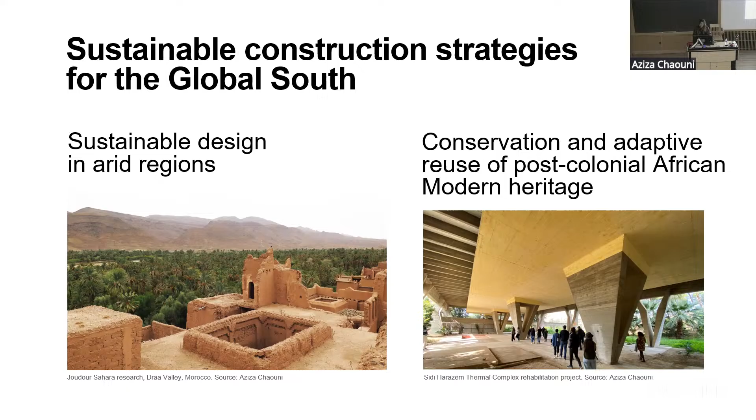Over the years, these two focused research streams have increasingly centered on the African continent and have remained intimately interconnected, both aiming to address various conditions of scarcity, a theme with a recent resurgence in architectural discourse. In the regions where I operate, manifold scarcities abound: materials, water, food, landscapes, public infrastructure, public space, financing, governance, arable lands, expertise, and so forth.

These conditions of scarcity are further exacerbated by climate change's nefarious effects, such as long droughts, floods, and wildfires, as well as a post-colonial condition that compounds models of social injustice and unequal distribution of resources. You may wonder what makes these seemingly doomed environments fertile ground for research and practice with potential global implications.

In addition to the ethical urgency of developing locally rooted architectural solutions for this built environment, whether booming urban centers or disappearing oasis villages in the Sahara, arid contexts stimulate new ways of thinking, designing, collaborating, forging solidarities, and engaging with stakeholders, thereby crafting novel models for sustainable architectural practices. Such scarce contexts also urge us to critically reevaluate the abundance and endless growth paradigms embedded in our capitalist economies.

The full potential of working in and investigating scarce contexts is unleashed when we challenge the common conceptualization of scarcity, which typically focuses on tangible shortages defined as situations where demand continuously outstrips supply, leading to progressively dwindling reserves. Instead, we should consider resources not as isolated commodities, but as part of a complex social, economic, political, and environmental ecosystem.

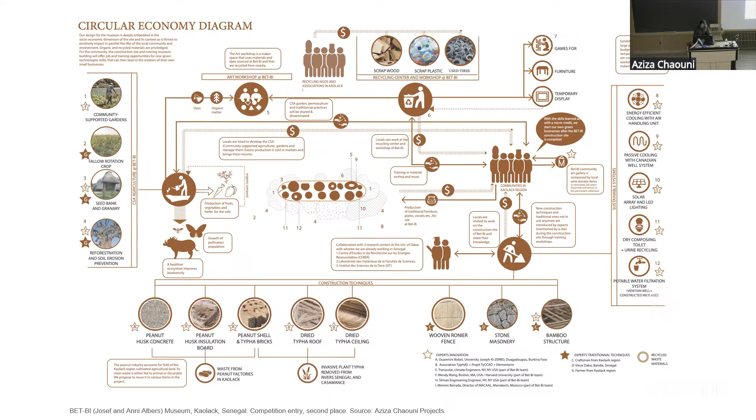If I use the lens of scarcity to present my work today, it is not simply to remind everyone of the challenge facing our planet and profession, but to introduce an interesting channel of exchange between the global North and global South. Through this channel, knowledge transfer can flow in both directions, enriching new avenues for mutually beneficial research on sustainable construction.

For instance, the academic environments of my past homes, the University of Toronto and Harvard, and my current home, EPFL, along with my experience working with Renzo Piano, my office experience, and my dual training as an architect and civil engineer, have allowed me to develop techniques and methods specific to contexts in the global South, which then came to inform other sites and pedagogies back in the global North.

I firmly believe that some of the solutions for a sustainable tomorrow will be found as much in such cross-fertilization as in interdisciplinary collaboration. My extensive practical and teaching experience around the globe, extending from New Caledonia, Australia, North America, Brazil, to the Middle East and Africa, has allowed me not only to erect and rehabilitate a series of buildings, but also to build solid and lasting relationships with a wide network of governmental, academic, and civil society institutions.

This network forms a solid base for continuing such pursuit at EPFL, whose rigorous academic environment can only amplify its impact on a global scale. Let me illustrate this process further through my two research streams. The first one, sustainable design in arid climates.

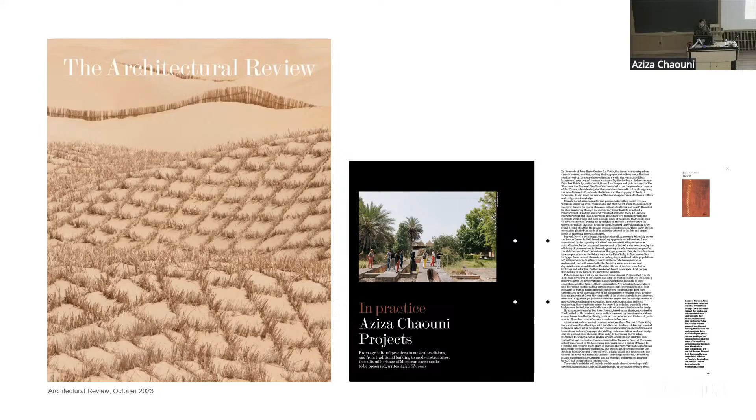I experienced firsthand the relative nature of scarcity. What is scarce to us is not to nomadic tribes who can thrive with little water and a simple mobile shelter made out of camel hair.

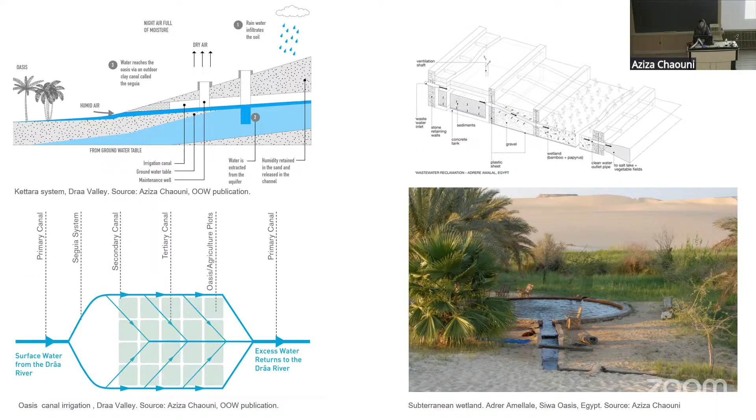I discovered means used to address a scarcity that was exponentially expanding before my very eyes, derived from both traditional techniques like water catchment through the old Kettara channels or the communally managed ancestral oasis irrigation system, and the new ingenious ones like the subterranean water treatment wetland of Adrère Amellal in Siwa, Egypt.

This research journey led me to obtain the Aga Khan Fellowship at Harvard, where I formalized my fieldwork, further investigating the theme of desert tourism globally, taught courses on the topic, organized an exhibition, international conference, and published 2 books in collaboration with Virginie Picon-Lefebvre.

This Saharan trip also led to the creation of the Designing Ecological Tourism Lab at the University of Toronto, which offered numerous applied research seminars and studios in Morocco, Jordan, and Australia, and inspired journal articles and a book of our research on the creation of a newly protected area called Shobak in Jordan, located north of Petra.

Throughout the studios and seminars, students addressed the extreme scarcity of natural resources, materials, and funds, leading them to think across scales and in an integrated manner in which landscape, infrastructure, and architecture were apprehended as one system. Working hand in hand with partner institutions and schools has been key, and also with sociologists and ethnographers prior to site visits.

Students had the opportunity to continue working on their project as researchers over the summer terms, returning to the site for more fieldwork and compiling research data, a pedagogical model that I was the first to develop at the Daniels Faculty at the University of Toronto.

Currently, I am continuing both this pedagogical model and my 2 main streams of research at my new academic home, the École Polytechnique Fédérale de Lausanne, or for short, EPFL, that I joined in January 2024 after 18 years at the University of Toronto. I specifically moved there to establish a funded lab dedicated to advancing sustainable construction and heritage conservation through equitable collaboration between the global North and South.

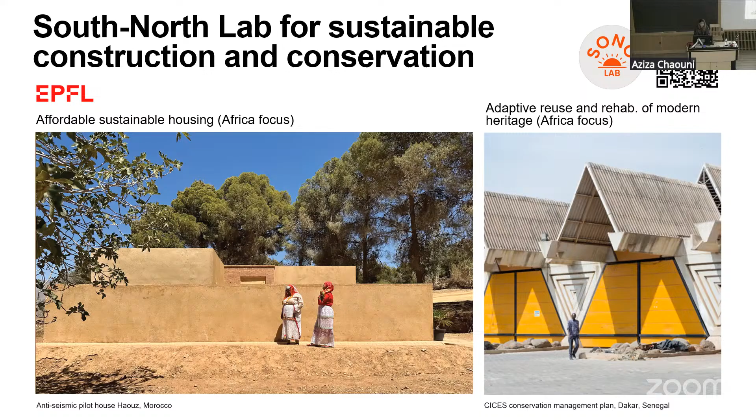Its research is rooted in design, prototyping, and implementation, bridging academic inquiry with practical application. Rather than remaining in the realm of speculation, the Sono Lab tests new models of building and conservation in real context across the global South, ensuring that architecture research is both transformative and directly impactful. In addition, Sono positions at its very core South-North knowledge exchange as a mutually beneficial process.

The lab is housed in the Smart Living Lab, one of EPFL's 4 annex campuses dedicated to sustainable construction. And the lab gathers professors working on different facets of sustainable construction from EPFL and 2 other schools based in Fribourg, making it a fertile ground for collaboration.

The Smart Living Lab is housed in a reused beer factory and has a large workshop ideal for 1-to-1 scale prototyping. And a new timber building is currently under construction that will soon house our offices. This building is designed to be a research infrastructure. It has changeable facade systems and roof components, but is also filled with sensors.

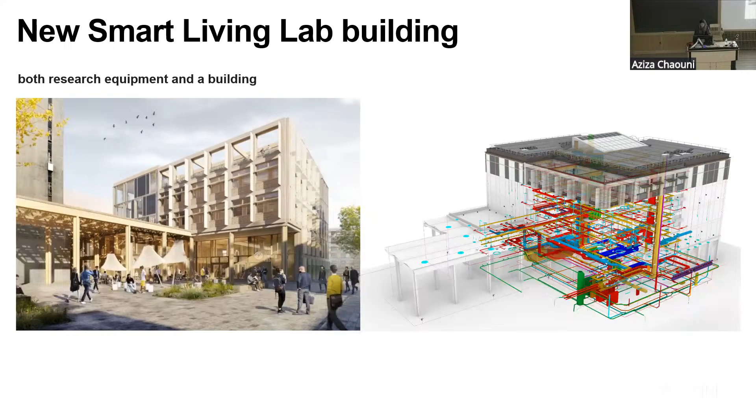After past protectionist approaches failed in Shobak, we proposed that in the first phase, users, rather than a higher authority, become the stewards of the park. To do so, we expanded RSCN's integrated ecological management approach, which offers a holistic manner to integrate all components of the ecosystem, air, soil, water, and organisms, including humans, and ecosystem functions in a broad perspective that encompasses environmental, social, and economic dimensions.

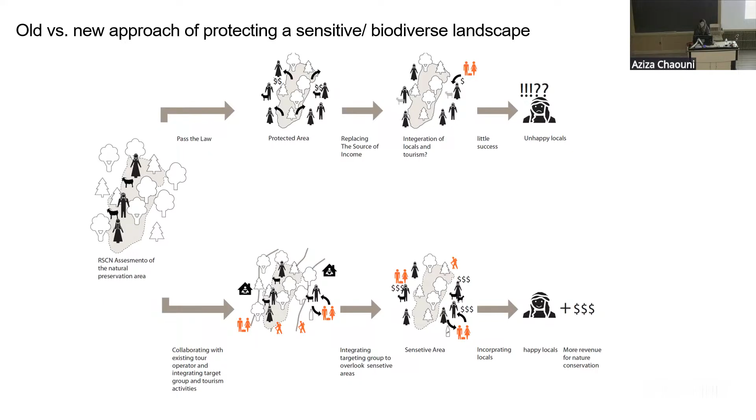This included architectural and landscape dimensions, strategies for both the protection of fauna and flora and the economic development of local populations, most of whom are semi-nomadic herders and foragers. We propose a 2-phase master plan with 3 types of actions: build, upgrade, and organize.

In phase 1, all actions were located in the protected area buffer zone in order to empower locals to become actors of the park safeguarding, while in phase 2, we reinforced low-impact ecotourism infrastructure and the protective environmental measures inside the park. The architectural interventions were designed to be autonomous in water and energy and have a low carbon footprint,

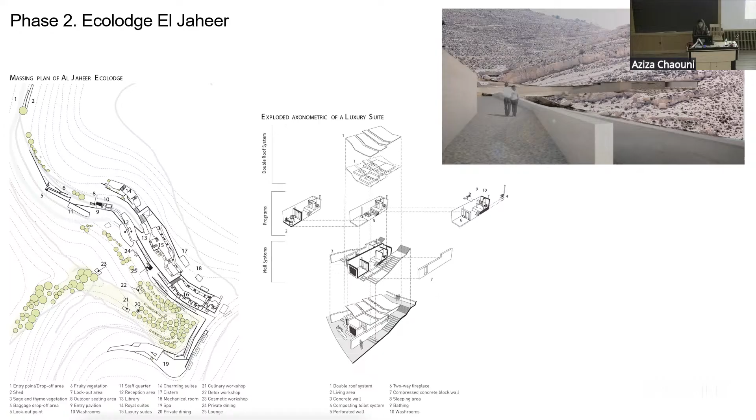favoring adaptive reuse, such as the reuse of this abandoned stone village that you can see here as an eco-lodge, and mobile lightweight structures such as the seasonal modular camp, which uses a steel structure and camel hair fabric.

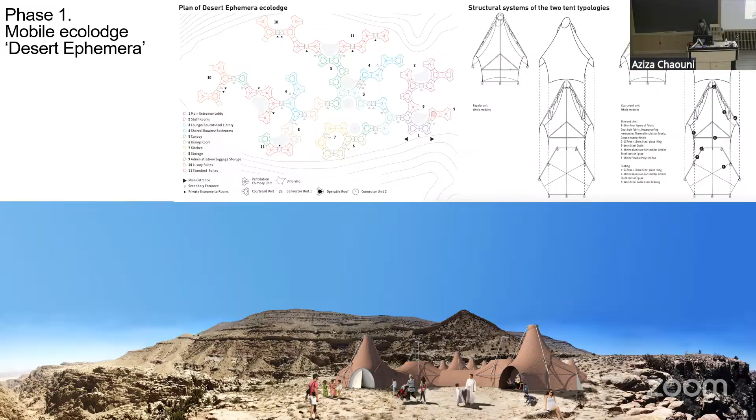Similarly, in Morocco, the NCSAR Research Project aimed to create a new protected area in the southeast in a remote, fragile, arid zone where the endangered mouflon sheep lives. We led this project with the Moroccan Ministry of Tourism.

And working with RSCN that we brought with us from Jordan and planner ecologist Professor Nina Mary Lister as consultants and our sponsor, the Moroccan Ministry of Tourism, we adopted a similar integrated method as in Shobak, in which a menu of guidelines supports the overall master plan and its different zones. So it's like technically a Chinese menu.

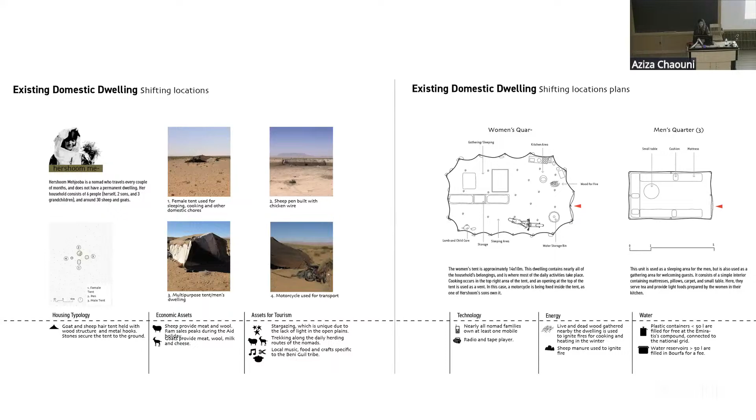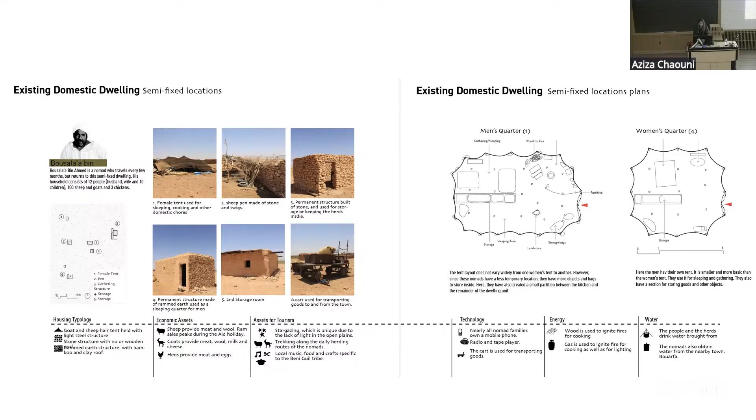The main stakeholders being nomadic and semi-nomadic Beni Guil tribes, we propose upgrading their existing housing and their facilities to host tourists and to better their living conditions, following careful study of their daily routines, their changing lifestyles and their existing dwellings. So here, for instance, our analysis of an existing nomadic dwelling, and here our analysis of a typical semi-nomadic dwelling. Then, through collaborative workshops, we could design their new dwellings using local materials.

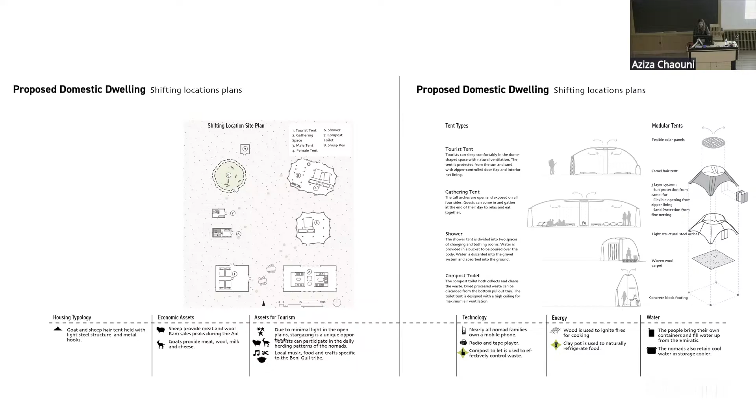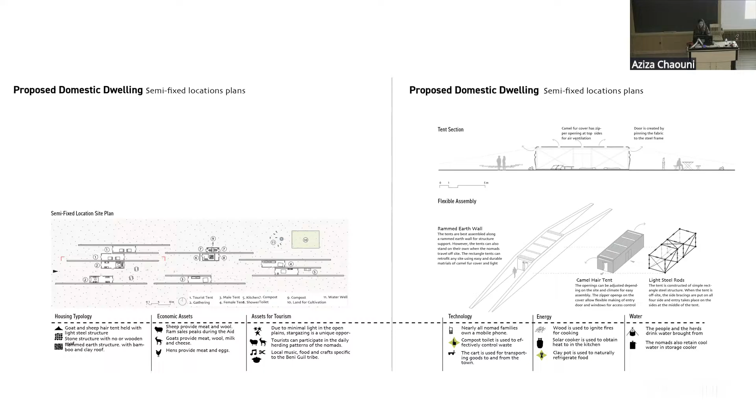So you can see here the nomadic dwelling upgrade in which we updated the existing dwelling kitchen, bathroom, and added a new multifunctional room that you can see here in green. And you can see here the view of this new room. And here is the semi-permanent dwelling in which we repaired and extended the existing rammed earth walls, and we also added new walls and added camel hair fabric for the roofs. And you can see here a view of that dwelling.

We propose to restructure its productive land, its thermal spring, and its derelict village, turning them into a new well-being destination, mainly geared towards locals and Moroccan tourists, focusing on circular economy, agritourism, and thermalism. Following 6 months of consultation, workshops, and interviews with the villagers and stakeholders, we could develop a vision where the oasis permaculture is revived thanks to the thermal spring reuse of water, which has proven to be beneficial to the existing olive trees and palm groves.

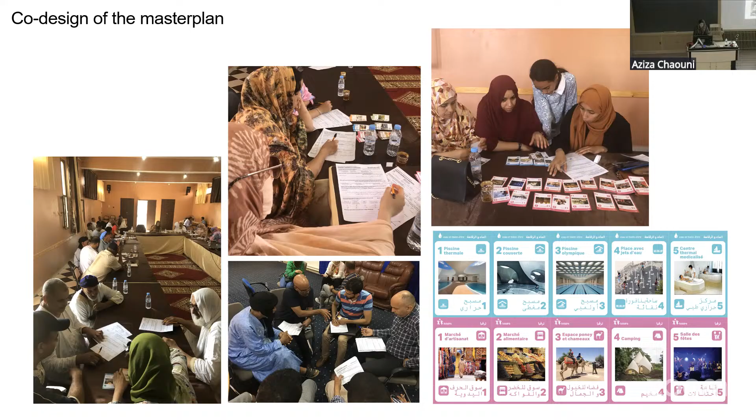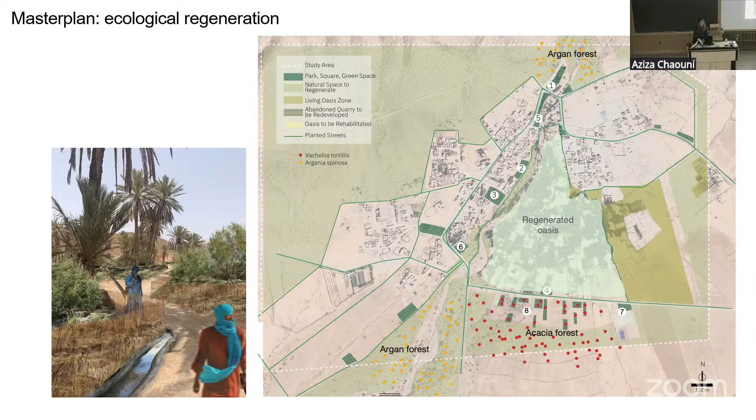The oasis is used beyond its agricultural function and becomes the backdrop for a series of public spaces such as plazas, picnic areas, and playgrounds. Over time, the oasis and surrounding ecosystem regeneration is projected to drastically improve the thermal comfort of the village and its public spaces, bringing back lost fauna and flora.

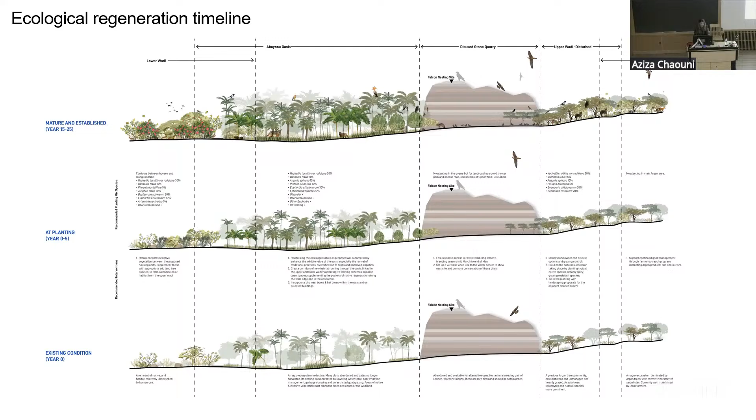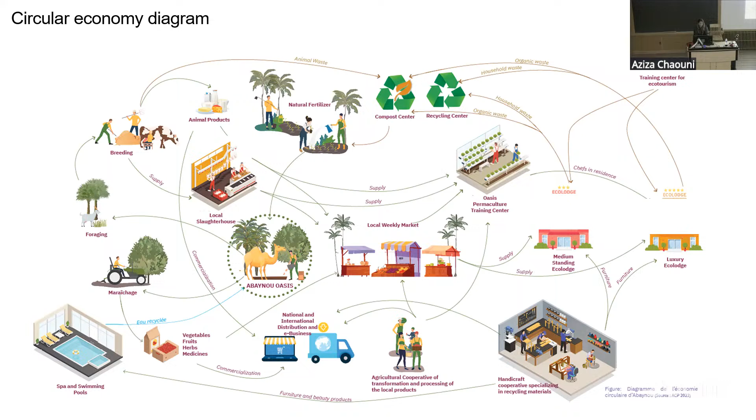An overall water scheme allows for the reuse of all wastewater of the village for public space irrigation and groundwater recharge. The entire project embraced a circular economy model with the reuse of most of its waste, organic waste through a centralized composting center and inorganic waste through a craft cooperative. A detailed guideline booklet outlines sustainable manners to upgrade the village center's existing buildings, old and new, all using local materials such as earth, stone, wood, and reeds.

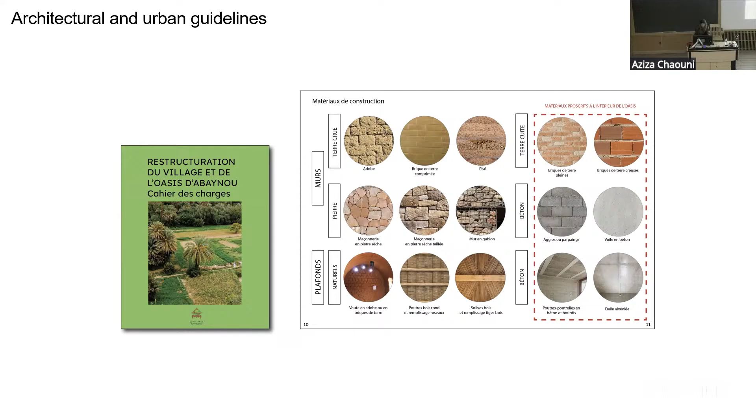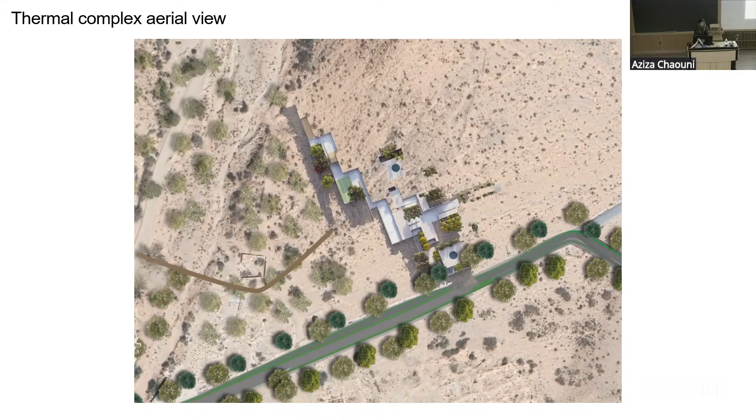Unlike the norm in Morocco, where new thermal institutions are always high-end and out of reach for most locals, we convinced the region of Guelmim, our client, that we should democratize access to this ancestral spring that locals visit weekly today. Everyone will be welcome in this new thermal complex main pool, but different levels of service will be offered depending on one's budget. We integrated the new thermal complex, built with stone masonry from a nearby quarry and compressed earth bricks, within a steep hill with only few volumes emerging, echoing the vocabulary of the local villages nearby.

This allowed the spring water to be used and reach the oasis irrigation system by gravity. This project demonstrates that Aziza Chaouni Projects, my office, intervenes beyond research and design, where we are also community organizers and lobbyists.

In addition to ecotourism, one of my most significant contributions to addressing scarcity in arid regions is my research project, Out of Water, Design Solutions for Arid Climates, co-led with my colleague at the Daniels Faculty, Associate Professor Liat Margolis. Both born and raised in arid countries, we sought to develop a toolkit for designers to address scarcity within their projects.

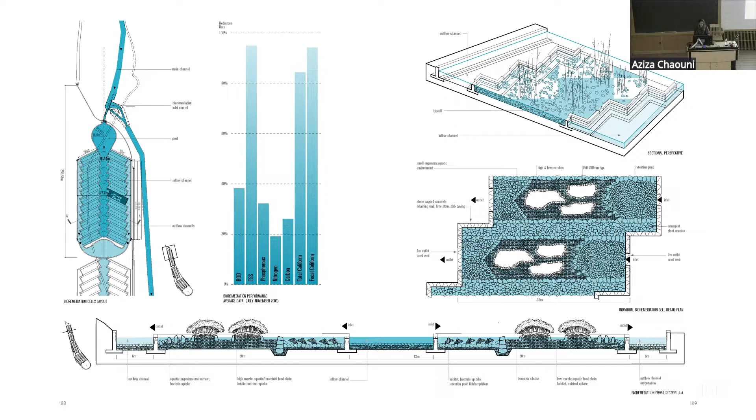Based on 5 years of research, the preparation of and feedback on a traveling exhibition, as well as a major conference, the results of the Out of Water project are presented in a series of case studies and essays by international experts, including analytical drawings of both projected and existing solutions. We developed an analytical matrix by which we analyze each project's performance and energy consumption with the support of detailed drawings.

Our most potent conclusions to address water scarcity within the design disciplines included first the integration of ancestral knowledge and technologies from other fields, such as agriculture, into design, and secondly, the necessity to completely rethink our centralized water system and its outdated single plumbing approach, along with reimagining landscapes and buildings to capture, store, treat, and distribute water to make every single drop of water count.

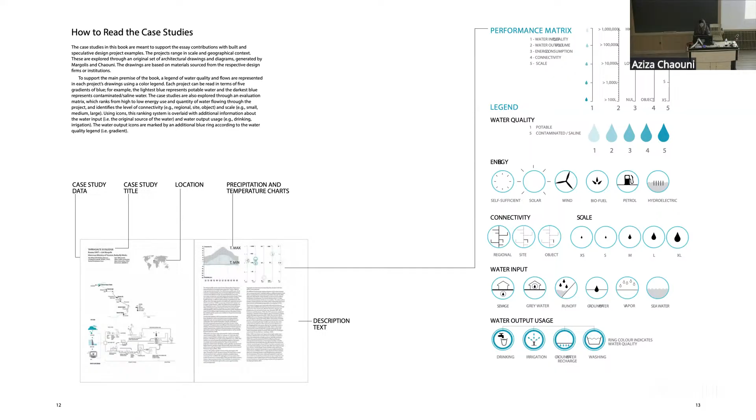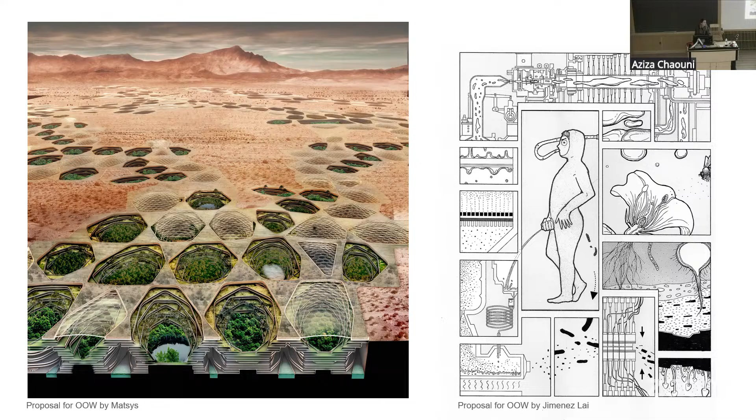As part of the project, we invited a dozen architects to apply this principle in designs for a water-scarce tomorrow. You can see here a utopian vision of a future town in the Arizona desert, and on the right, a utopian or dystopian future by Jimenez Lai, very Dune-like, imagining a bodysuit that would recycle your own urine.

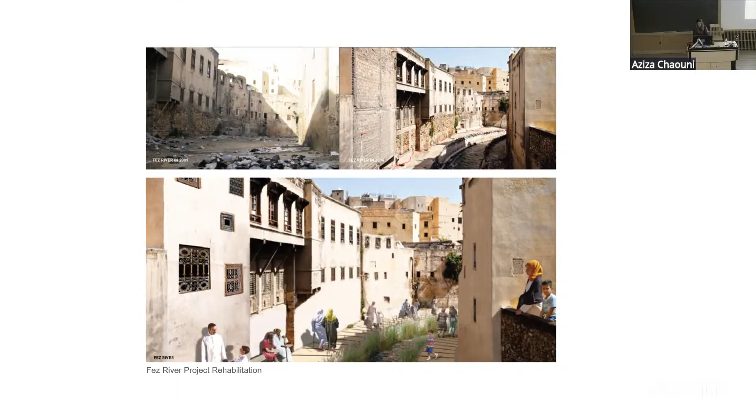So in my own practice, I would say that my most significant contributions to this stream are the Fez River Project and the Jodour Sahara Music School, which both won Holcim Awards for Sustainable Construction. The Fez River Project included the depollution and uncovering of the river that crosses the UNESCO World Heritage City of Fez, which had become an open-air sewer. Due to time constraints, I will not dwell on this project today, unfortunately, but you can listen to my TED Talk about it, which you can find on YouTube.

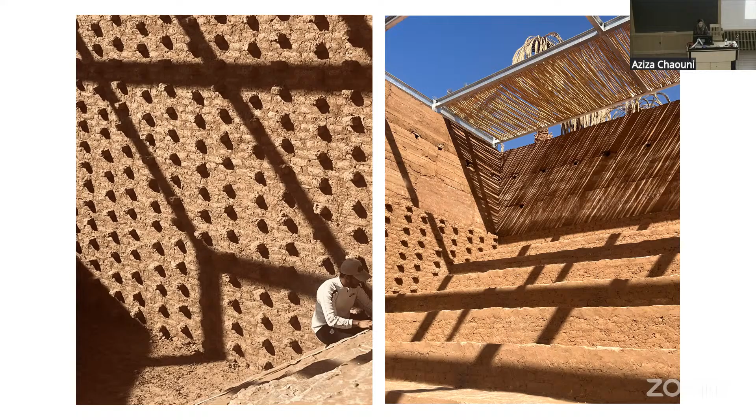But instead, I will focus on the Jodour Sahara project, which is actually extremely dear to my heart. It started as an NGO that I co-founded by luck in 2016 with other foreign and local partners that offers free music, dance, and environmental awareness classes to around 1,200 children and youth living in the oasis of M'hamid El Ghizlane, located at the very end of the UNESCO biosphere, the Oasis Valley of the Dra in southern Morocco.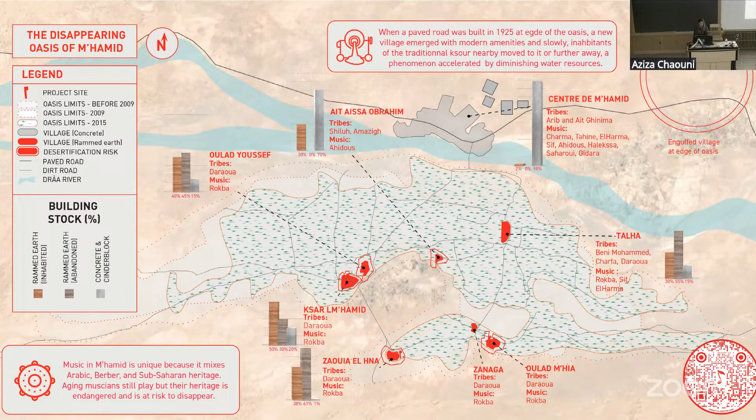M'hamid is terribly affected by drought and climate change, and its centuries-old cultural, architectural, and agricultural heritage is declining, literally being swallowed by advancing sand dunes. Actually, based on my experience, sand dunes would advance by about 1 meter each year. M'hamid's exceptional culture is a mix of Saharan, Berber, Hassani, and Sub-Saharan cultures, and has a vast and diverse repertoire of dance and music.

A perfect illustration of what I refer to as slow architecture, like slow food, the project proves Cedric Price right. The solution was not architectural space at first. Instead, the school's curriculum, training, and instruments, as well as the collection and translation of traditional songs and dances, were first reestablished.

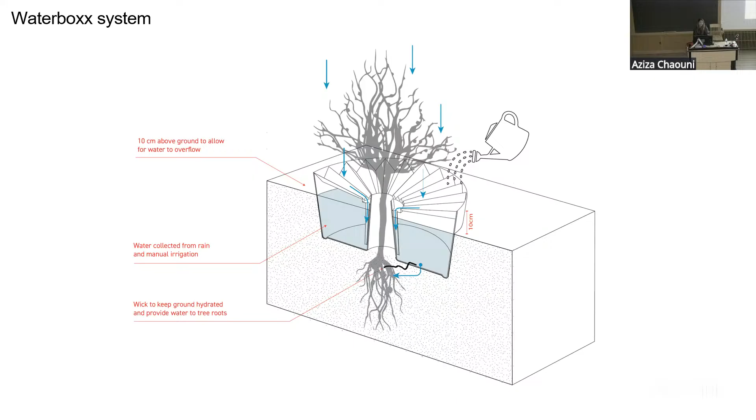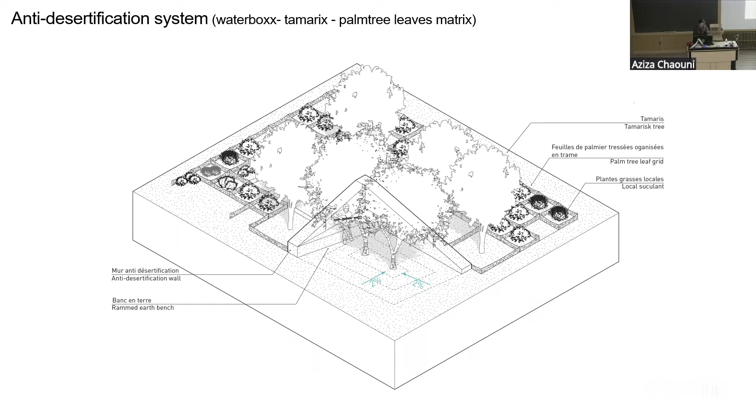Then we tested various anti-desertification techniques over a decade with our partner, the NGO Sahara Roots, using the Waterboxx system, which you can see here, a simple recycled plastic device which provides roots with only the right amount of water that they require, combined with tamarisk trees whose roots stabilize soil, and a palm tree leaves matrix planted with succulent plants. The combination of these systems has proven successful, achieving a 75% survival rate for tamarisk trees after 3 years compared to 30% with usual drip irrigation.

When it came time to expand the school due to its growing success, we proposed a new campus at the edge of the oasis so that its architecture could also act as a rampart against advancing sand dunes. We led a series of workshops with the music school students, the teachers, local craftsmen, musicians, etc.

And the final design was composed by a series of rammed earth buildings oriented against the dominant winds, with the large barrier of our anti-desertification system, as well as guest bedrooms that act together with this system to stop sand dunes from advancing. So architecture and landscape working hand in hand.

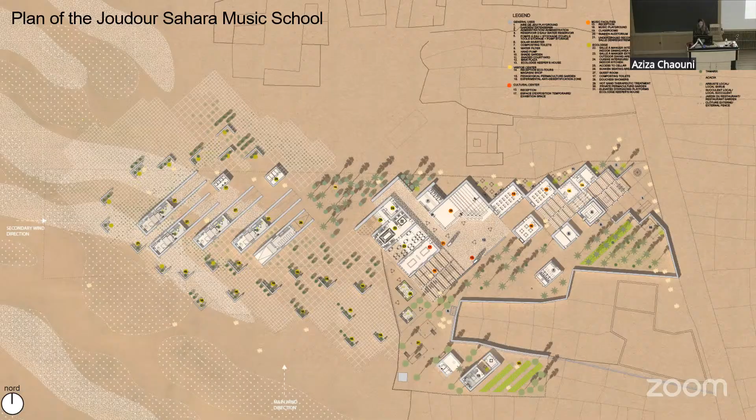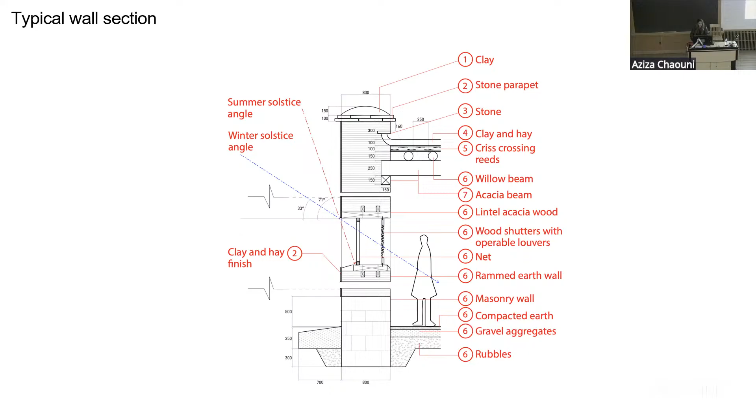A thorough analysis of locally available material and skills helps us choose a material palette using primarily rammed earth, compressed earth, brick, stone, lime, acacia wood, clay, and reeds, all sourced within a 50-kilometer radius and not an ounce of concrete. Indeed, all our buildings are constructed with stone foundations of 80-centimeter thick rammed earth walls, acacia beams and lintels, and traditional roofing with reeds and clay.

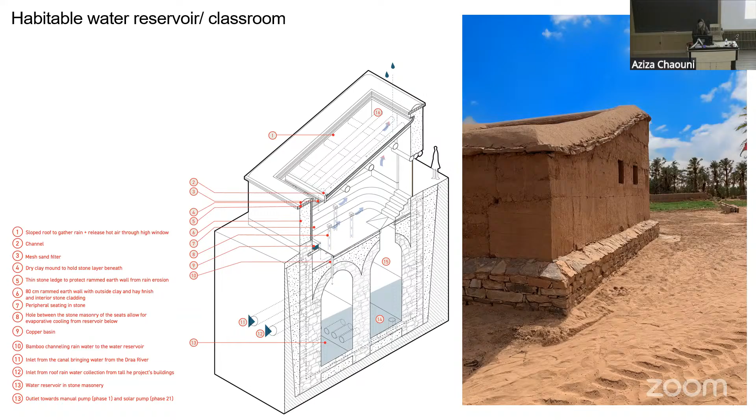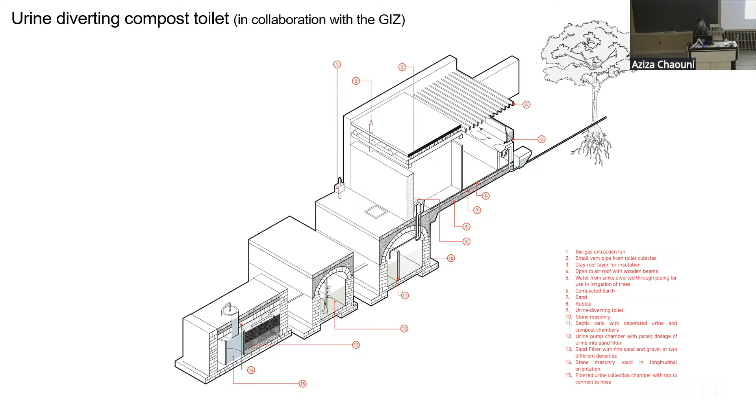Further investigations in construction in arid climates include the recently completed Meknes dorm in Morocco for the French Education Abroad Agency, with its ventilated southern, eastern, and western facades, composed of 30,000 compressed earth bricks containing only 4.5% of cement, using the specific mix by LafargeHolcim called the Durabrick mix. And a custom-made metallic structural system connects the vertical brick to the building's main facade, so it creates a double ventilated facade.

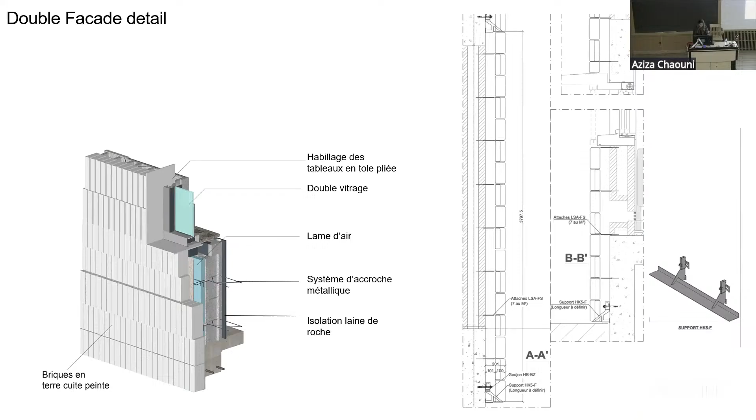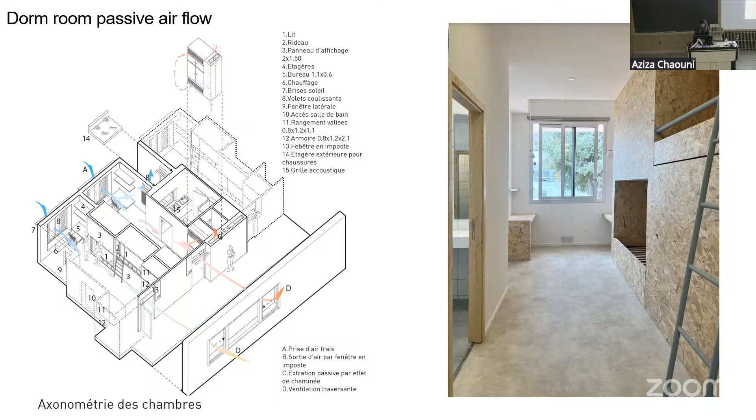So this CEB, so compressed earth brick facade, is only part of an arsenal of passive techniques used to keep the dorm rooms cool during the hottest month of the year, including solar chimneys for hot air extraction and solar-powered fans and vents located on the main facade, which is facing south. The building has become a pedagogical tool for students and teachers, demonstrating that living without air conditioning in Morocco is indeed possible.

Another project in the stream is the Craft Exhibition Center, located in the town of Ifrane, known as the Little Switzerland of Morocco. Originally a ski resort built by the French in the Atlas Mountains amid the second largest cedar forest reserve in the world, the small town now faces skyrocketing temperatures and lack of snow, losing many of its winter tourists and its original vocation. In its urban center, abandoned buildings abound.

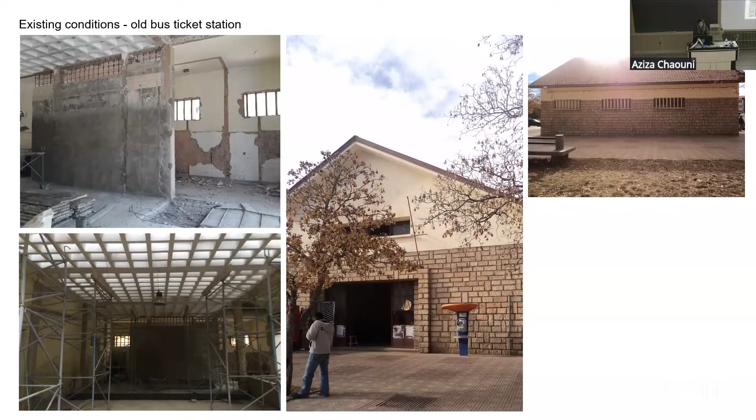When asked to demolish a derelict 1926 bus station to build the Craft Exhibition Center for new summer tourists, we challenged the brief and proposed instead retaining the original stone building that you can see here. We repurposed it by adding a new program needed by the community, in addition to the Craft Center, a women's cooperative to sell bread. They were selling it outside, under the rain and under the weather. So with a budget equivalent to around $60,000 US, we made minimal yet precise modifications.

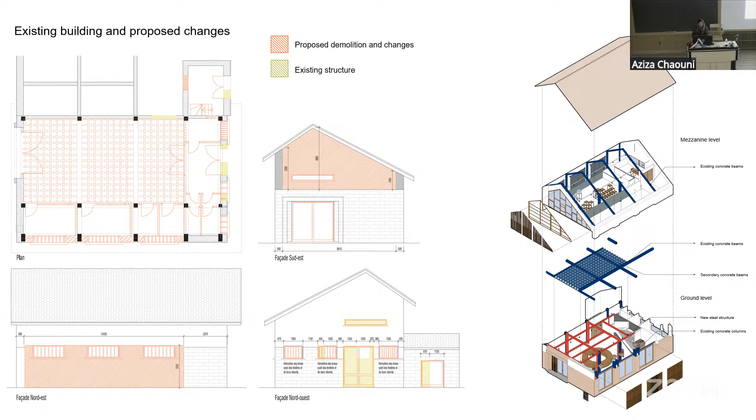We added a mezzanine atop an existing beam matrix and opened up the ground floor and main facade towards the plaza and park and equipped them with cedar slats, brise soleil for protection, and built flexible display furniture. We collaborated with the Ministry of Forests and the nearby Ifrane National Park to produce the slats from collapsed cedar trees located on remote parts of the park, which were usually stolen or sold for fuel.

Thanks to this project, this part of town was revived and activity returned during the daytime. And even during nighttime, where we don't see that many people here, but they are. And in addition, a dozen unemployed women also found jobs, and we initiated a new sustainable reuse program with the Ifrane National Park, with the proceeds supporting some of the park operation.

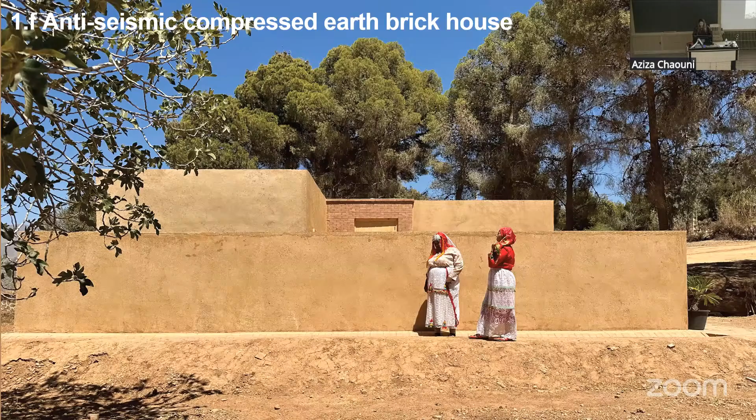And I want to end this section with my most recent contribution to this stream, which is the anti-seismic prototype house, completed as a volunteer effort with a team of Moroccan engineers and with the generous support of Lafarge in Morocco.

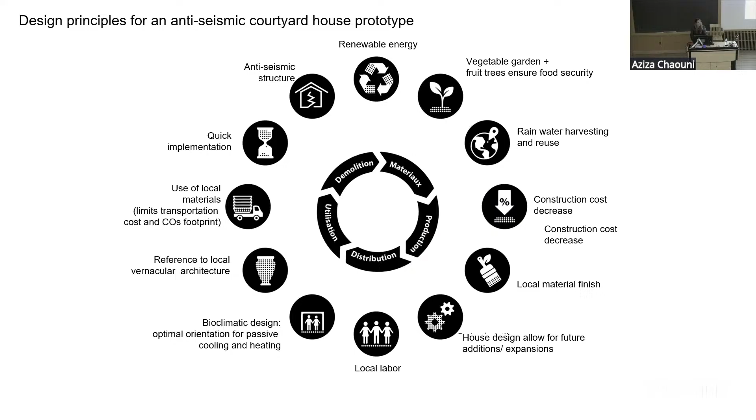So in the aftermath of the 2023 Moroccan earthquake that left about 3,000 people dead, I knew that permanent housing solutions should be proposed sooner rather than later, as winters in these regions of Morocco can be very harsh because it does snow there. And so with a few of my Moroccan engineer colleagues, we decided to volunteer to help the Moroccan government develop an anti-seismic, affordable and sustainable housing prototype. So we started first by establishing sustainable design guidelines, including material and energy types to be used.

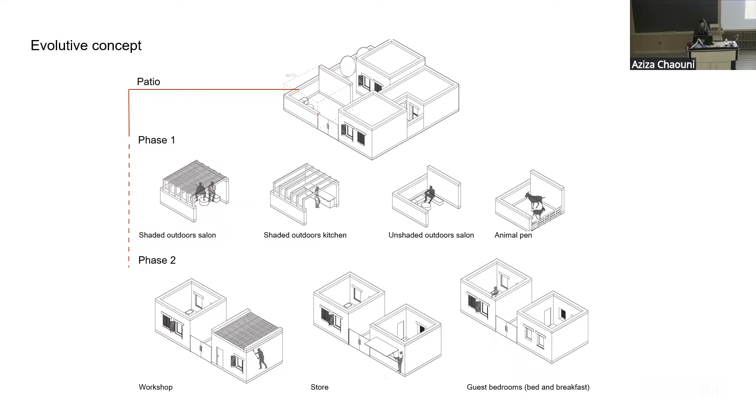Aiming to fit the government price tag of about $14,000 per home, while suiting local lifestyles and being anti-seismic and sustainable. So we imagined the house to evolve over time and also provided plans for different options to expand, also in the section of the patio of our house. And for ease of implementation, the house is composed of 3 modules of similar sizes.

So we used a collaborative approach with specifically designed tools to engage with the survivors of the village where this prototype was going to be built. And these workshops helped us adjust the final layout of the house. And we did find out actually that the typical house had only 1 courtyard, but that the need of the local population today exceeded only 1 courtyard.

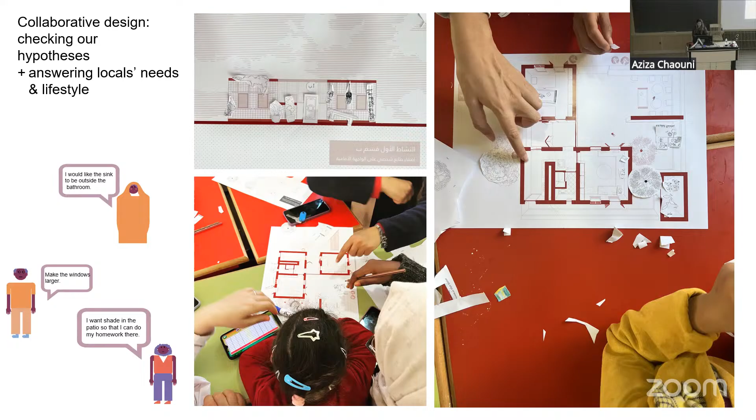And the house actually has 4 different courtyards, each one used for a different function: cooking, hosting guests, having animals, and also drying your wet clothes. And so the house was entirely built using 3 types of compressed earth bricks that we designed specifically for the project. So there is one that's the Lego type, so literally like a Lego. It doesn't require any mortar for the walls, arched for the ceiling, and full for the floor.

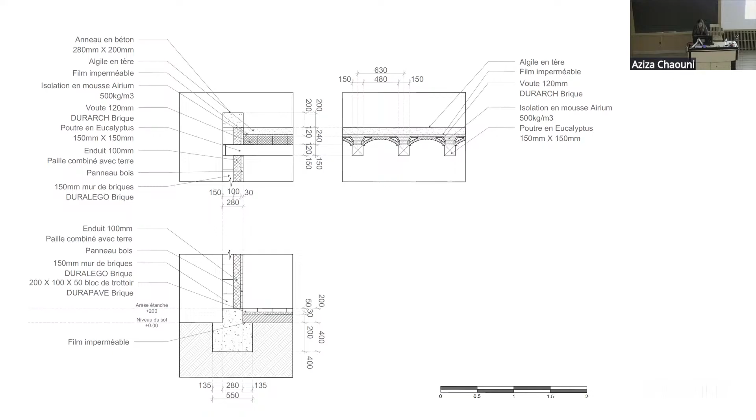And like I mentioned before, the bricks were composed of 95% earth and 4.5% cement. And we are currently patenting the arch CEB model, which you can see here. And so something also to keep in mind is our original plan was to produce these bricks on site with a press. It worked very well in the lab, but on site they were very poor quality, so we ended up having to do them in a factory.

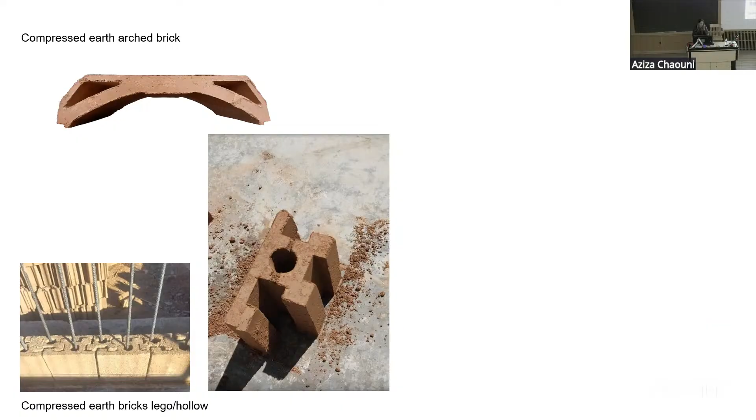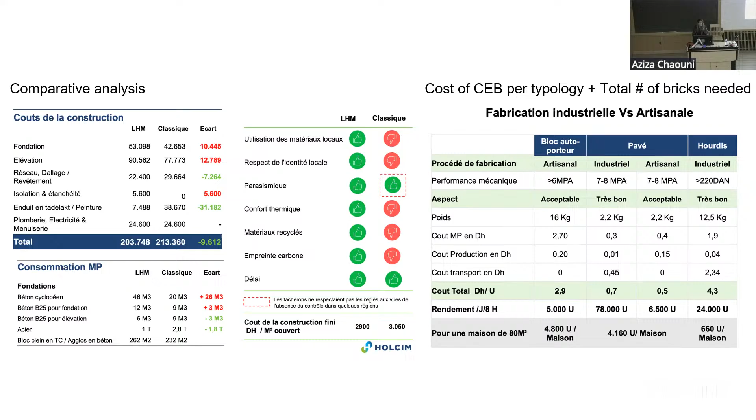And finally, also you can see, at the bottom, the test. At the beginning, we thought that we needed to put reinforcement in every hole, but after some more calculations, we only have reinforcement at every 1.5 meters. And what is exciting is that a comparative analysis by Holcim did conclude that with an improved prototype using the new brick, we can further lower the cost of the house to $12,000.

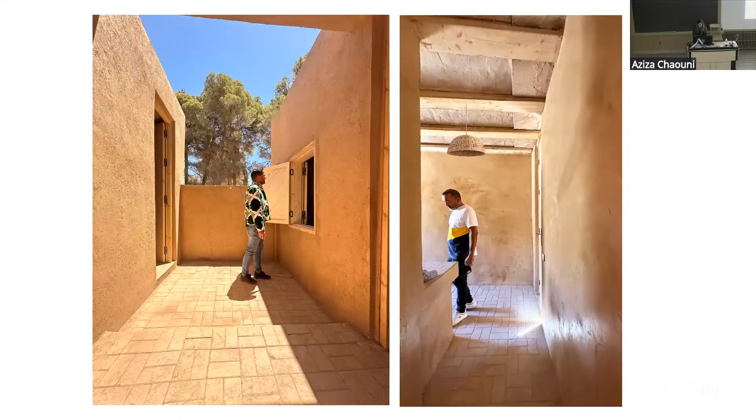And at last, here are some photos of the final house with the 2 lucky ladies that now are living there. Here it is. There it is again. So you can see some of the bricks that we wanted to be seen that we left without plaster. The kitchen and the small kitchen courtyard. The interior, you can see the arched bricks that rest on the wood beams on the ceiling.

So now, let me move to my second theme, post-colonial modern heritage rehabilitation and adaptive reuse in Africa. So this interest stemmed from a pragmatic observation. The scarcity of public amenities in African cities coexists with an available, sturdy and stellar building stock from the post-independence era, mostly owned by the government and states, and often abandoned or underutilized, and most importantly, in relatively good condition, despite their lack of maintenance.

Many of these buildings are exceptional and reflect a precocious architectural exploration of sustainable approaches. And after the Second World War, newly independent African states commissioned public architectural works to advance the crafting of new national identities and to assert their economic and cultural progress on the international stage. A geographically rooted modernism emerged as a new language and an experimental ground that advanced political, cultural, and aesthetic notions of contemporaneity in the region.

Notably, some extraordinary public building complexes and landscapes were erected, championing passive cooling systems, the use of local materials, and the reinterpretation of vernacular forms and patterns, alongside the rationalist design approach and extensive use of exposed concrete. Despite their significance, the in-depth documentation and analysis of buildings from this era remain scarce today, as academic efforts and research funding have very often focused on studying the vernacular or the colonial periods.

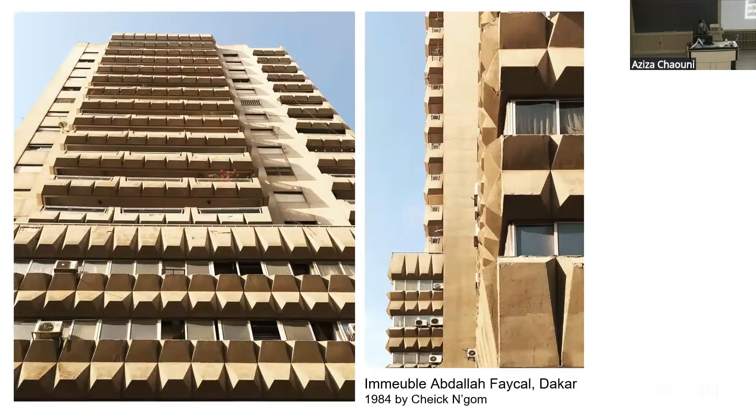Research on this neglected topic is even more salient today because of the looming demolition risk that might erase these landmarks of modern buildings from the collective memory. And second, because of the pressing need for public amenities in African cities. So how do we retrofit these buildings with limited budget and local expertise in modern heritage rehabilitation? How do we address disapproval of these buildings, often judged as passé, obsolete, ugly, or monsters by the public and decision makers? And most importantly, what methods and research opportunities relevant to the global north context can emerge from these rehabilitation and adaptive reuse projects?

So I am fortunate to be working on the long-term rehabilitation of 3 major post-colonial modern landmarks as applied research projects, thanks to the seed funds from the Getty Foundation, Keeping It Modern Grant, and the NGO World Monuments Fund, and the US State Department. Actually, not anymore. That last grant was cut off last March.

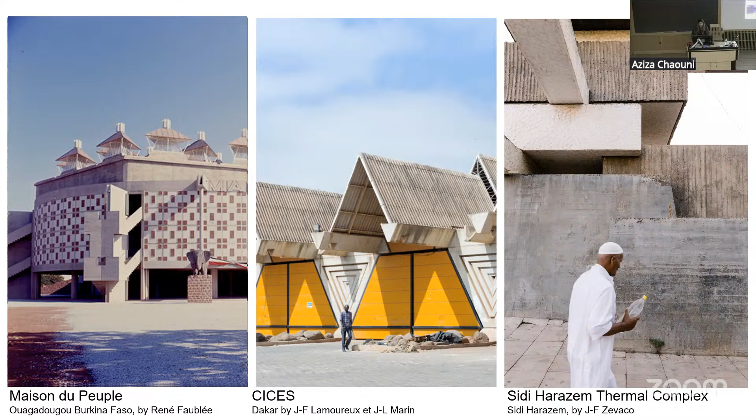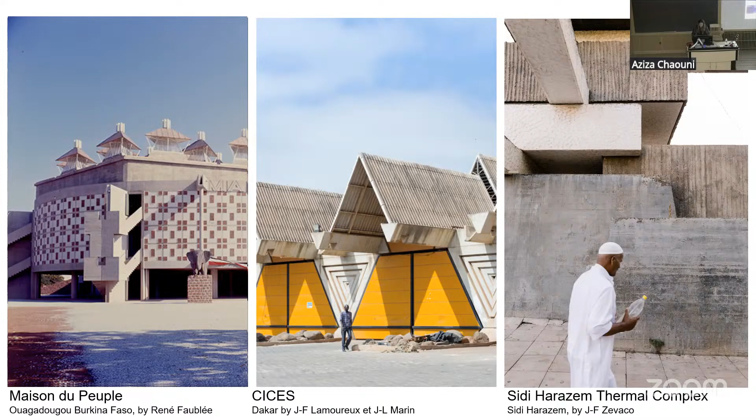That's another story. So the Sidi Harazem Thermal Complex is one of them, the International Fair of Dakar, and the Maison du Peuple in Ouagadougou, Burkina Faso. So all 3 projects embody different trajectories defined by their social political context, but they share several similarities. Morocco, Senegal, and Burkina Faso are all Francophone countries in West Africa with historic, economic, and cultural and diasporic ties to France. Each site had limited available archival documentation, and they all represent a form of situated modernism, blending the international style with local vernacular architecture.

Today, each site houses activities different from what the architect originally intended in those parts still in use, while others are simply abandoned, unfortunately. And each project is currently in a different state of progress, with 2 having their conservation management plan completed and approved, and rehabilitation has started, however, very slowly due to COVID. And I treat all 3 sites as an experimental ground to test new approaches to conservation and adaptive reuse from the master plan scale to the material and repair scale.

So let me start by actually explaining the very unusual genesis of this project. So they were all self-initiated, with technical teams assembled, coalition formed, lobbying done to convince governmental bodies to embark on their rehab, local schools involved with curriculum building and in situ training, funding raised and relationship built with renowned international institutions, providing financial support and expertise. I stress this aspect because it highlights a departure from the usual norm of praxis and applied research in the global north, one that necessitates intense and sustained activist efforts, often at the transnational scale.

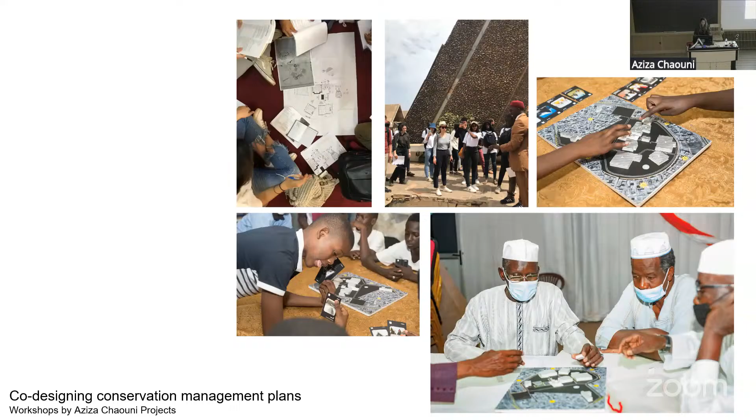It allows the modern buildings and their infrastructure to act as a skeleton onto which diverse programs and rehabilitation initiatives, either temporary or long-term, could organically and incrementally attach or find a home. In context with shifting political and socioeconomic dynamics and limited funds, this approach seems to be the most suitable. Most importantly, the scaffold is co-designed with local stakeholders to be both resilient and realistic, composed of a series of small-scale, low-budget, easy-to-implement actions, each labeled with the level of urgency based on archival documents demonstrating the architect's original intentions and approach, and the role each item plays in the overall integrity and significance matrix.

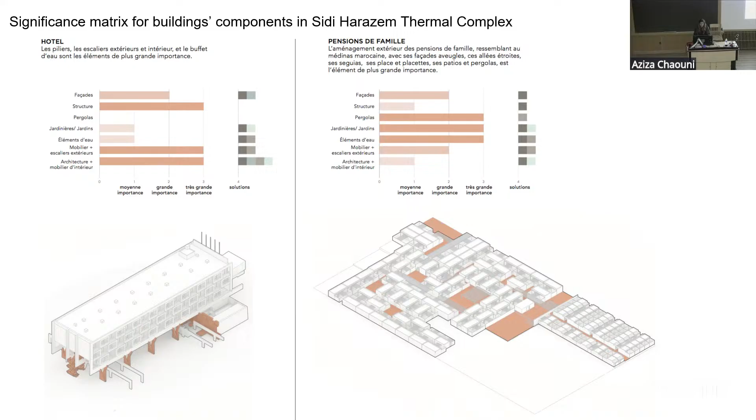Our ultimate goal is to build a solid foundation that could outlive the end of the conservation management plan, making every stakeholder, from the small stall owner to the decision maker, ambassadors of the project. There is no turning back after the significance of the building or complex is understood by users. Its loss starts to be seen as irreversible, and decision makers start being held responsible. Hopefully so. So let me illustrate this approach with one of the three projects, the Sidi Harazem Thermal Complex.

Located near an oasis where a revered Sufi saint is buried, adjacent to a hot spring, Sidi Harazem was commissioned to Moroccan Corsican architect Jean-François Zevaco 3 years after Morocco's independence in 1959 by the State Pension Fund. It offered the first tourist destination to Moroccans following best practice tourism standards. It included a large shaded public plaza with a public spring, water fountain, a hotel, bungalows, a public forum called the Riad, composed of gardens and water bodies, 2 pools, a vegetable market, and a craft market.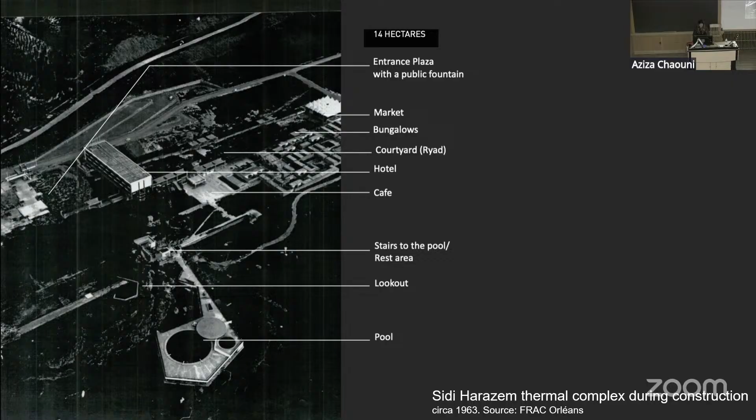Zevaco's architecture is exceptional in its poetic integration of nature and water with architecture. Water canals, for example, are carved into stairs. Gravity-fed ponds are interwoven with the central courtyard's garden, and the spring water-fed pool oddly resembles the traditional water catchment strategy of the region called the Sebka. And since childhood, I had visited the thermal complex with my grandmother who suffered from rheumatism, and she swore that after each visit to the saint and after drinking the water and bathing in the water, she was pain-free for 3 months.

Here you can see me in this photo with her at Sidi Harazem with the oasis in the backdrop. Sadly, I noticed over the years the thermal complex's slow decline with the closing down of its central courtyard, bungalows, and craft market. The coup de grace, if I may say, was the Moroccanization of the hotel, where traditional tiles were placed on top of the concrete and informal buildings were added around the pool and the main plaza.

So the owner who commissioned the complex to Zevaco, who is still the same owner, the State Pension Fund, was about to sell the complex to a Chinese golf course investor for demolition when I approached them to jointly apply for the Getty Keeping It Modern grant. So my intervention, probably along with the ridiculous cost of dynamiting such a well-built large concrete complex, probably the latter was the reason, made them change course and give the rehabilitation a chance.

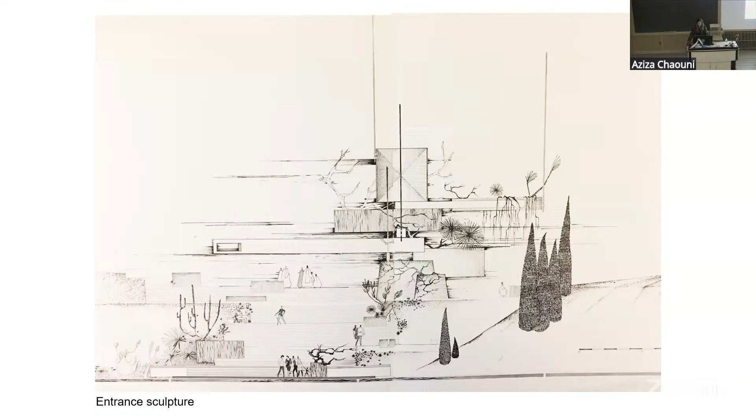So we embarked on a quest across 3 continents for the original architecture drawings of Zevaco's complex, which we had to assemble, to try to find them because they had been dispersed after his death. But we were still missing a lot of information on certain buildings. And we didn't know what the original finishes and the technical drawings were, etc.

So we countered the scarcity of information and archives by launching a major social media campaign called Je me souviens Sidi Harazem, Sidi Harazem that I recall, for which we self-produced capsule videos and asked people to contribute material and memories. So Sidi Harazem being Morocco's first post-independence leisure resort, the campaign garnered a flood of photos, postcards, testimonies, ancestors of the selfie, and more, all of which helped us understand Zevaco's original design intentions.

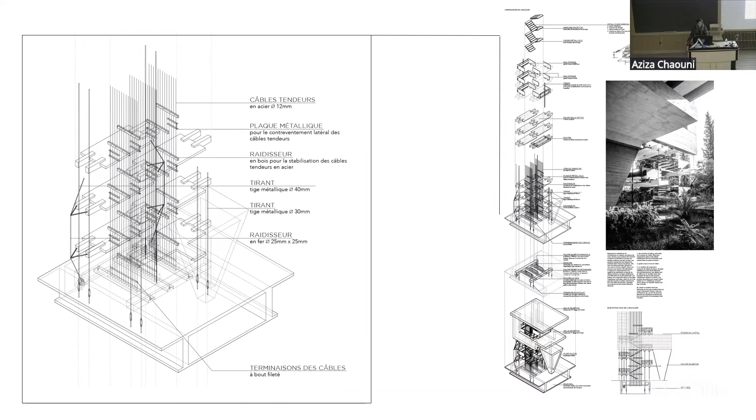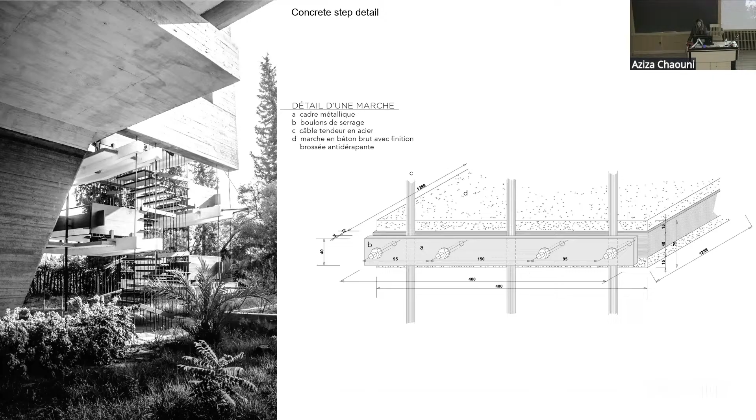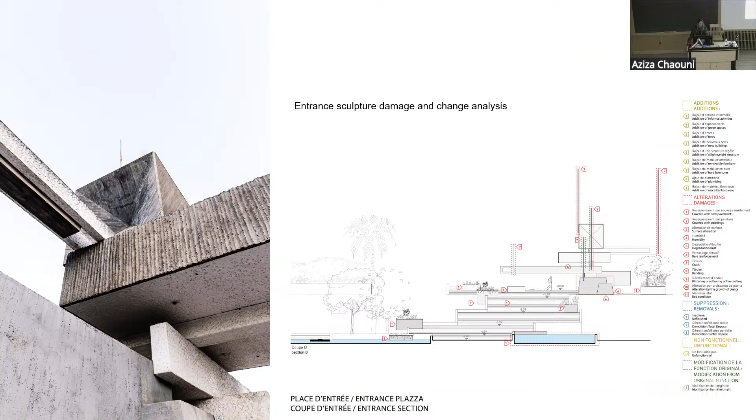We used drawings as a tool to document and study the buildings and their structure, such as the suspended concrete staircase designed with a redundant double spring system, we found out, that was hidden in an underground chamber to dampen vibrations. And you can see here one of its beautifully detailed concrete steps that are encased in a metallic frame. So with all collected documentation, we were able to mark all changes and damage, like in the case of the entrance sculpture here, which showcases the palette of the different concretes that Zevaco used throughout the complex.

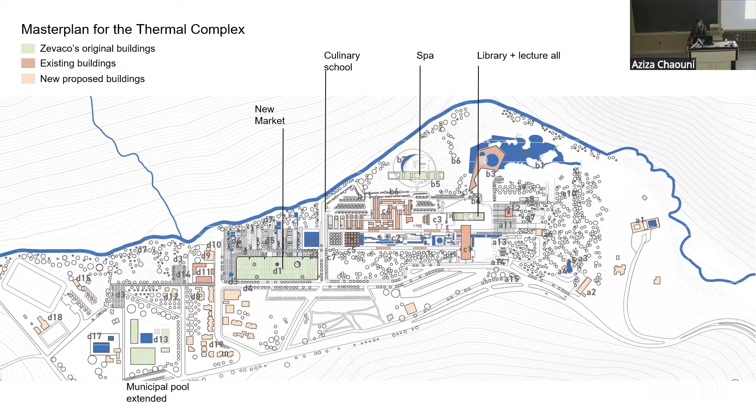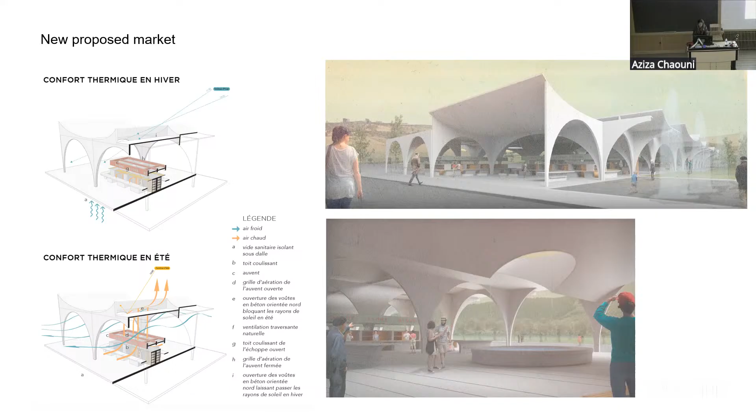We then returned to the drawing board to design the new buildings with a sustainable approach, such as the new market that has a very large canopy that would house the store owners, and to address the decreasing levels of the spring water that fed Zevaco's extensive waterworks. The entire water system of the complex was reconfigured as a closed-loop system that filters and reuses water, including gray water from the hotel and the bungalows.

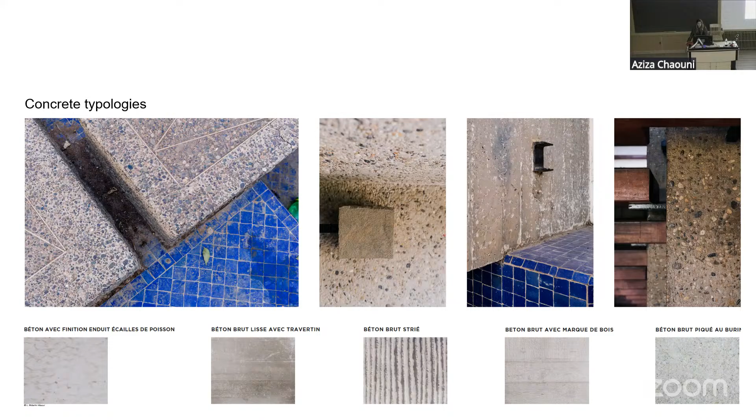Additionally, we conducted the foundation and concrete composition analysis to understand the constituents of the 5 types of concrete mixes Zevaco used for different effects. And we tested corroded rebar replacement and concrete repair solutions with epoxy and acrylic resin techniques, techniques which did not perform well and which I hope to improve upon soon.

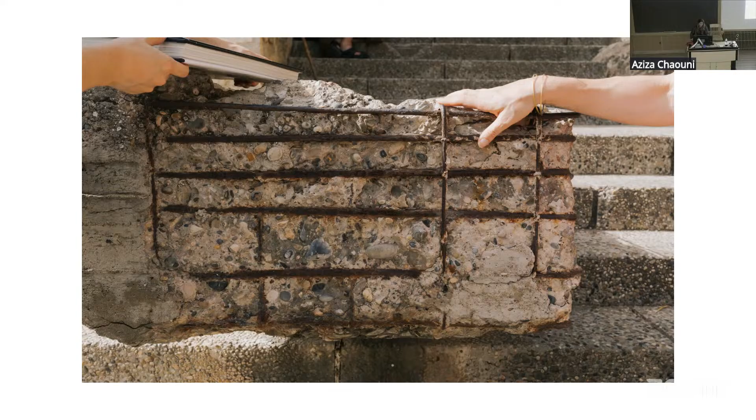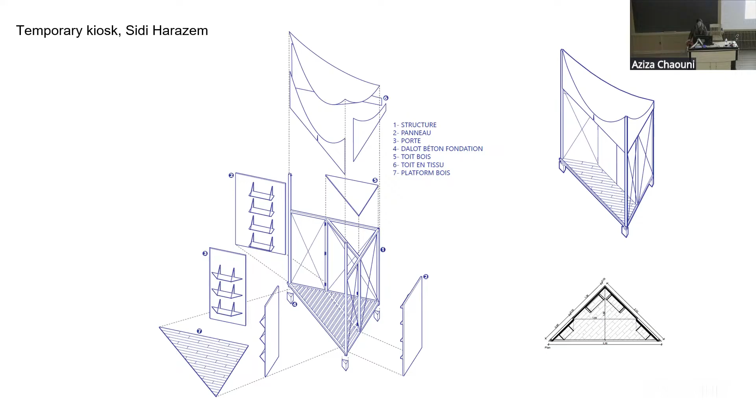So to start the rehabilitation of the complex, we provided the temporary stalls that were informally occupying parts of the complex with a temporary market, and we reused OSB boards that were discarded by the city after a temporary fair, as seen here, completed. Unfortunately, COVID delayed our progress on the actual rehabilitation, and then the government decided to spend the money on something else.

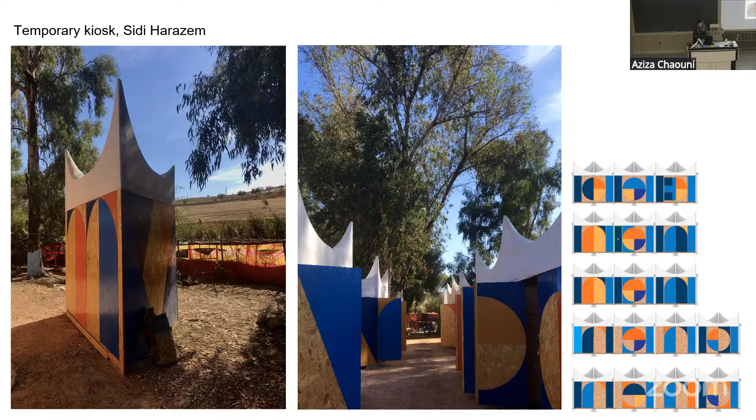But we turned to another approach, the approach of cultural activation, by organizing artist residencies and musical and dance events to keep the site dynamic and demonstrate that through minimal intervention, it can host events and programs. What's funny is that thanks to the Soccer World Cup, which Morocco is co-hosting in 2030, the project is getting back on track. And I hope to propose novel and affordable methods soon to repair the concrete that can also withstand high temperature differentials. So that's my own personal goal.

So the Sidi Harazem experience precipitated a series of other modern rehabilitation projects in West Africa and back in Toronto, like the Future of Ontario Place project, led with the World Monuments Fund, which attempts to safeguard and reuse a beautiful 1970s megastructure built literally on top of Lake Ontario, countering a provincial government that wants to demolish the complex and which unfortunately is demolishing it as we speak.

So we followed for this project, you can actually go to its website if you want to look at the work we've done, a similar approach as the one developed in a global south country in Morocco, in Sidi Harazem, mixing a campaign to collect documents, collaborative design, and in-depth research. The research and advocacy for the project are all compiled on this website.

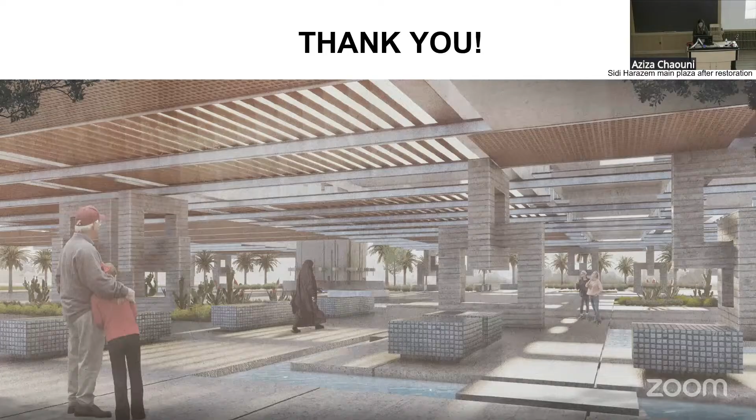So I would like to end here with this rendering of the main plaza of Sidi Harazem, and I hope that you've enjoyed understanding better my approach and looking at all of these different projects set in context of scarcity. Thank you so much for your attention.